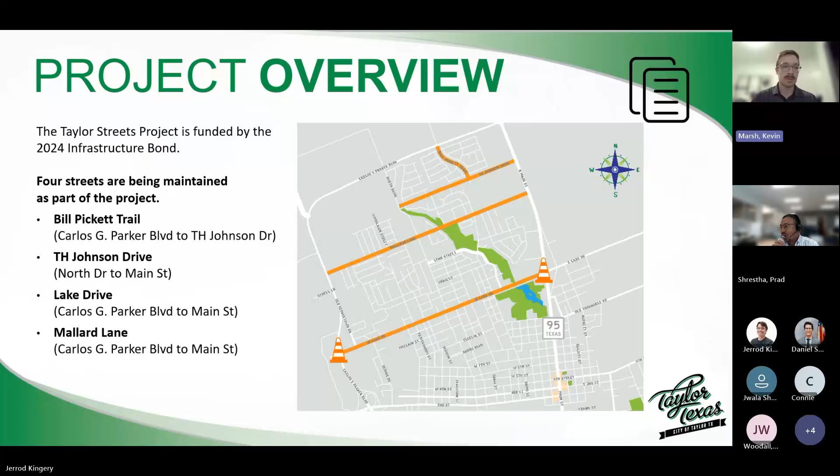The benefits of this project, as Daniel mentioned, are to maintain the road and keep it good. We're providing new pavement and refreshing the striping. We're going to be adding a center line, and we'll also be improving curb ramps, replacing some outdated ones, and improving a small section of sidewalk.

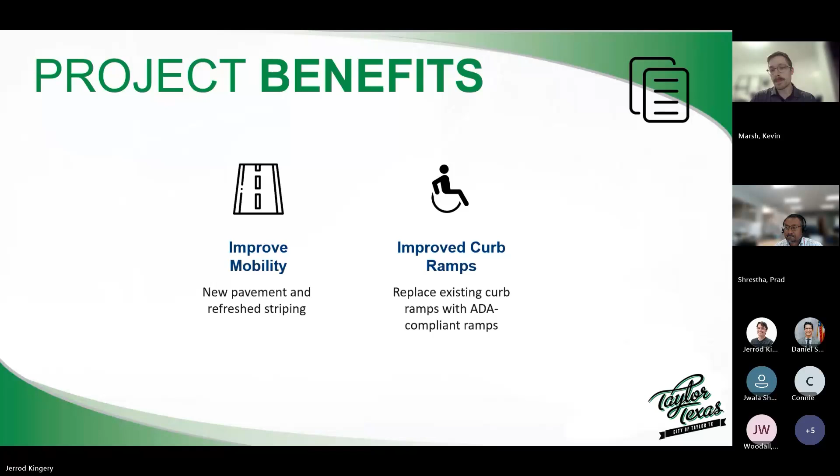These are the project limits. Prad will get into the construction specifics later, but as you can see, it's split into two different types of work. The first is microsurfacing, a more surface-level treatment, shown in the blue segments - from Carlos G. Parker to Old Georgetown Road, and from Castlewood Court in the middle of the street to Davis Street. Full depth reclamation is a bit deeper, with more digging, occurring in the orange sections from Old Georgetown Road to Castlewood Court and from Davis Street to Main Street near the park. There's also one section of sewer line construction that will be added during this project so we can do it while the street is already torn up; it'll be used for a future sewer line tie-in.

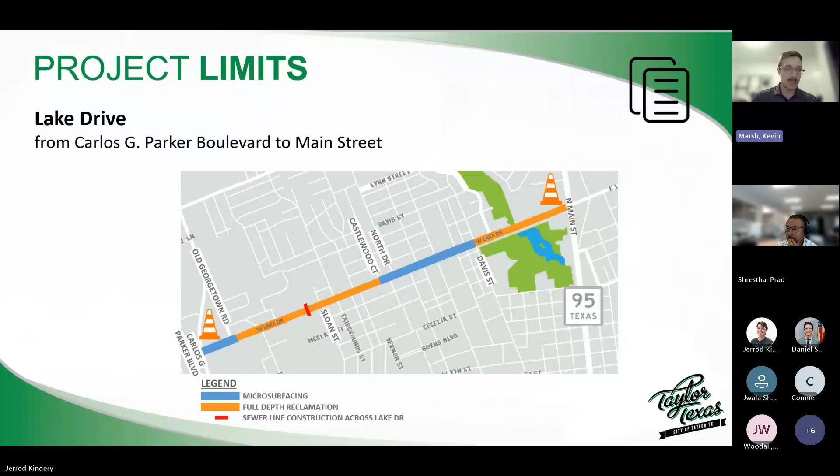This is a view looking east from Castlewood Court toward North Drive, right in the middle of the project. As you can see, you can just see the center line in there as well.

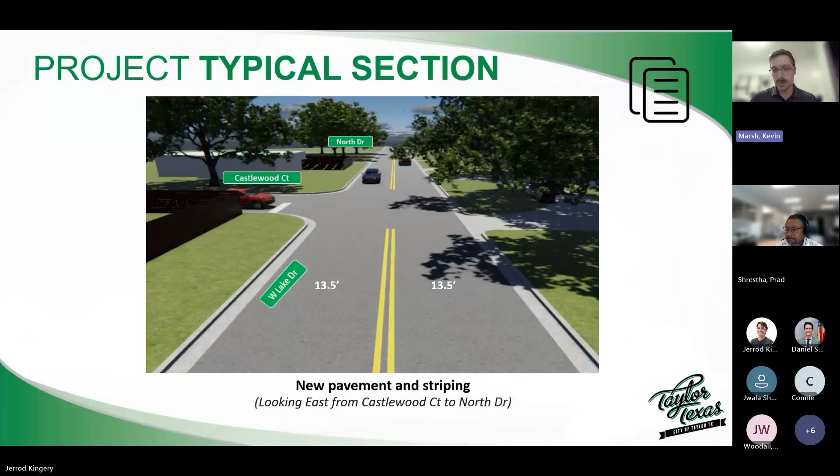I will pass it back to Prad and he'll get a little bit more in depth into the construction sequencing and explanation.

Thank you, Kevin. Once again, my name is Prad Shrestha. I'm a construction engineer with SDR, working for the City of Taylor. I'll go over the construction schedule, briefly go over what construction activities would look like, and some frequently asked questions for construction of this kind.

As Kevin mentioned earlier, as part of the pavement rehab of the Lake Drive project, there are two sections of Lake Drive that will get microsurfacing, and two will get full depth reclamation. From Carlos G. Parker to Old Georgetown and Castlewood Court to Davis Street are going to get microsurfacing, and Old Georgetown to Castlewood and Davis to Main will get full depth reclamation.

As far as the schedule, reconstruction work on Lake Drive is starting next week. The contractor has already started mobilizing equipment this week. They're going to start from the west end, reclamation from Old Georgetown to Castlewood, then move east. Reclamation from Old Georgetown to Castlewood starts next week, for approximately two weeks through August 1st, and then from Davis to Main thereafter from August 4th to August 15th.

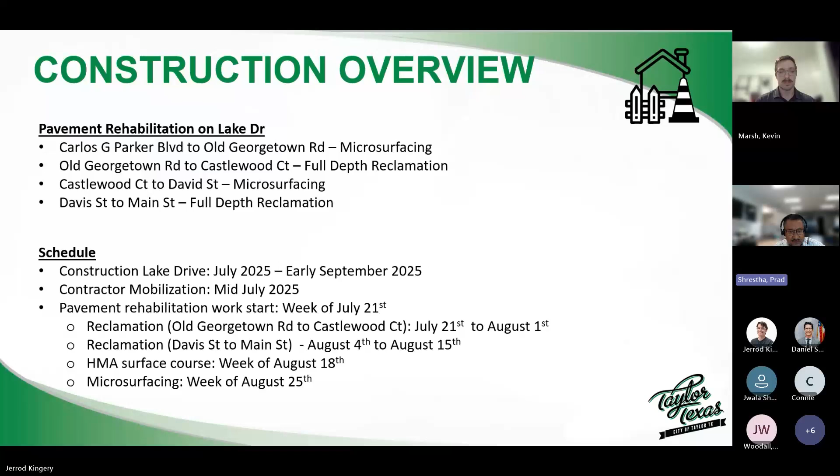Major sequence of construction activities include reclamation of existing pavement, microsurfacing, as well as miscellaneous improvements, such as Kevin mentioned earlier, curbs and curb and gutters, sidewalks, driveways, guardrails in a couple of areas, as well as a sewer line improvement for the future improvement just west of Sloan.

As Kevin showed on the previous graphics, the contractor will start from the west end of Carlos G. Parker going east. The reclamation of existing pavement consists of cement treatment of the reclaimed pavement materials to prepare the new base, placing the prime coat on the treated base, and paving the surface course with 2.5 inches of hot mix asphalt.

The microsurfacing is basically laying a mixture of dense graded aggregate, asphalt emulsion, water, and polymer additives. I'll go through some of the pictures here.

What you see on the screen right now is a reclaimer machine which pulverizes the existing asphalt and pavement base. It breaks the pavement section into small pieces and makes it ready for cement to be mixed with water, to make a more durable foundation for pavement.

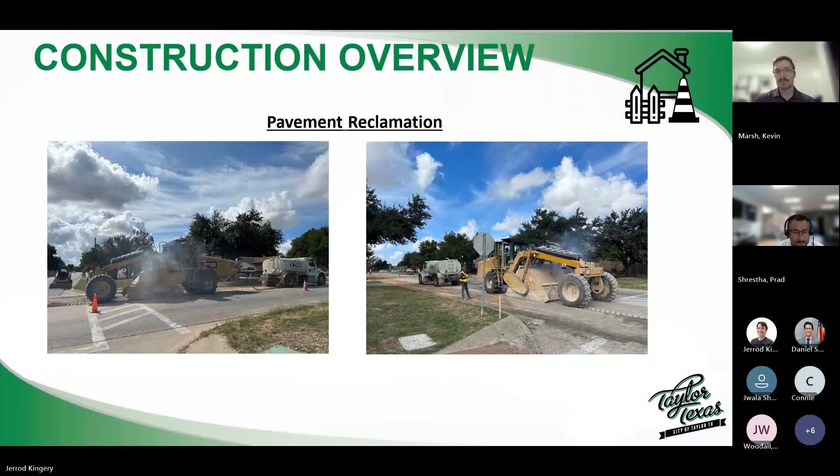These pictures show the pulverized, cement-treated materials being processed and compacted in place.

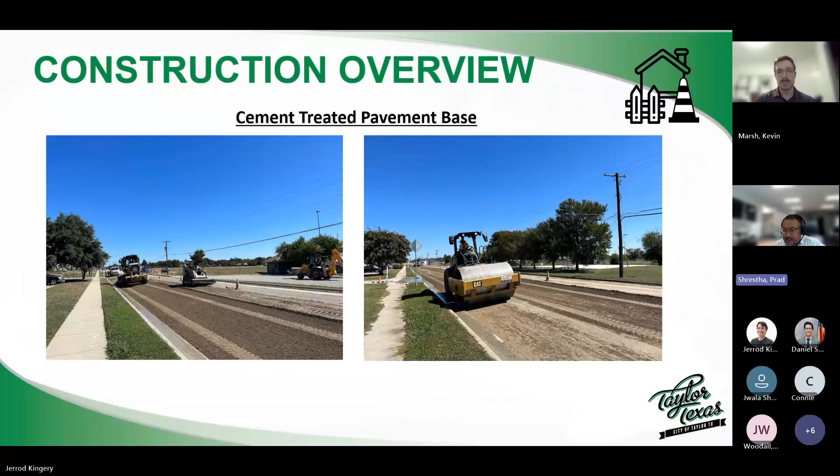After the cement-treated base is prepared, invert prime is placed for this kind of situation. Invert prime is placed by spreading asphalt emulsion oil and placing crushed rock, pea gravel size, what we call grade 5 rocks, and rolling over to keep the rocks in place. When this is completed, it is ready to receive the hot mix asphalt surface course.

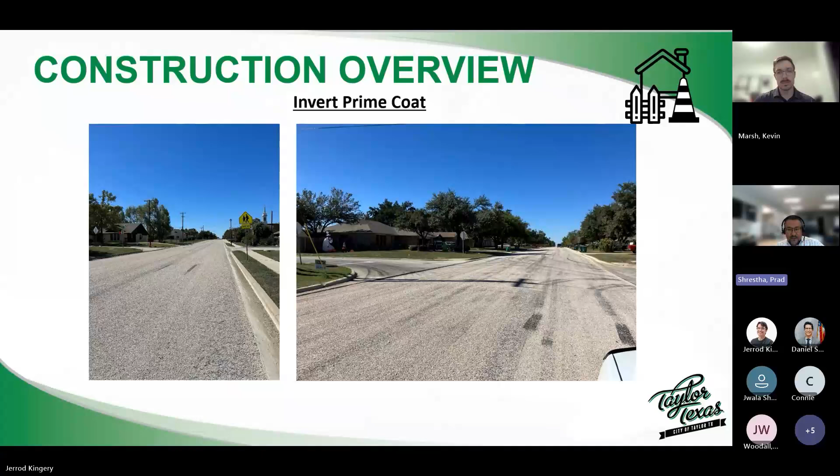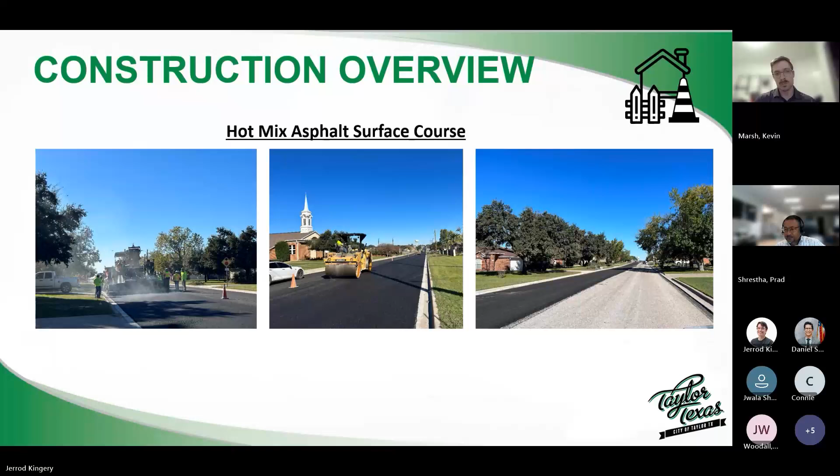It involves applying a thin layer of mixture containing asphalt emulsion, fine aggregate, water, and polymer additives to the existing pavement surface. This treatment helps improve skid resistance, seal minor cracks, restrict moisture intrusion, and restore a uniform appearance. Once placed, the microsurfacing typically cures in 1 to 2 hours and is ready to open for traffic. So it's a pretty quick operation.

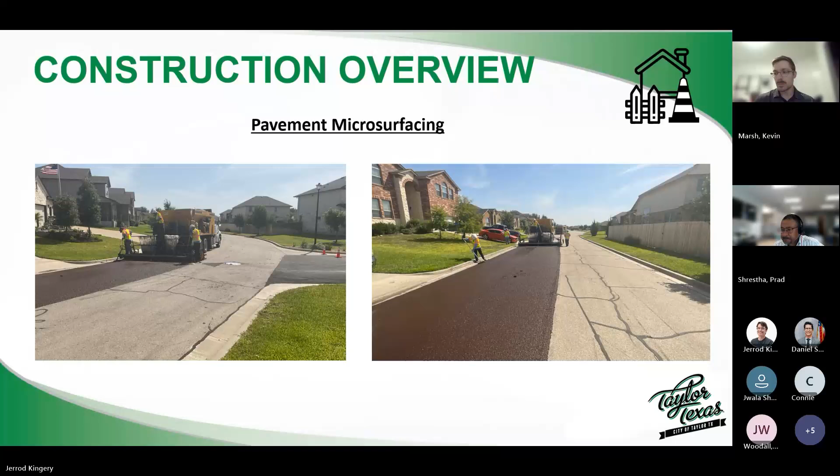I'd like to go through some of the frequently asked questions on a project like this in a neighborhood.

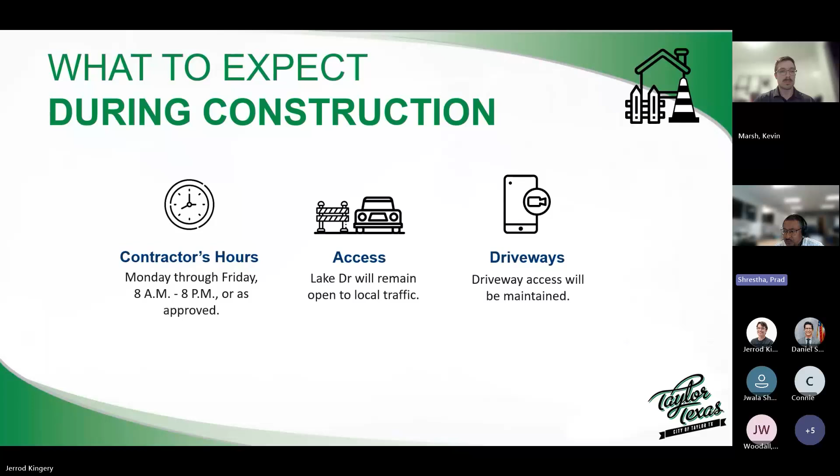For this project, contractor hours are Monday through Friday, 8 a.m. to 8 p.m., or as approved by the city. Access to Lake Drive will remain open to local traffic at all times. There will be lane closures, but not a shutdown of Lake Drive at any time. Driveway access will also be maintained, so there will always be access to all the driveways.

Access will be also maintained for trash pickup, mail deliveries, and special deliveries. Trash carts may be placed in their normal locations. Sometimes if the trash carts need to be moved around a little bit during construction, the contractor folks will help with that. But as far as homeowners, they can place their trash pickup at their normal locations.

Street parking, please avoid parking on the street during construction. This helps the contractor a lot.

Dust control: water trucks will be used during construction to minimize dust. Since this project will involve some cement placement, especially in the reclamation area, sometimes the wind will exacerbate the situation, but the contractor will do the best they can to minimize it as much as possible.

I suggest the residents and drivers keep an eye on construction activity and avoid being close to the active construction work area as much as possible.

The other aspect on Lake Drive is also tree trimming. There are lots of trees along Lake Drive, so tree branches will be trimmed as necessary within the project right of way for construction equipment clearance. Depending on how high the branches are, some of the branches may need to be trimmed for the construction equipment clearance.

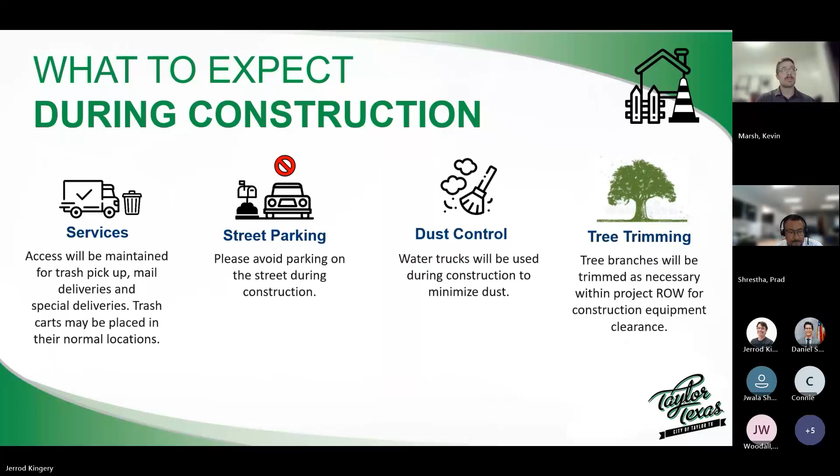Traffic control: no closure of Lake Drive is anticipated at this point. Localized lanes may be closed for construction, and flaggers will be used as necessary to maneuver the traffic.

This is during construction and outside construction at the end of the day, normal traffic flow during non-work hours will be in place.

I do want to add that if, due to unforeseen site conditions, it becomes necessary to shut down the road, a traffic detour will be in place. But at this point, we do not see the shutdown of Lake Drive at any time.

During construction, please remember to look for workers and construction equipment and be safe. We thank you in advance for your cooperation and patience while our work improves your street.